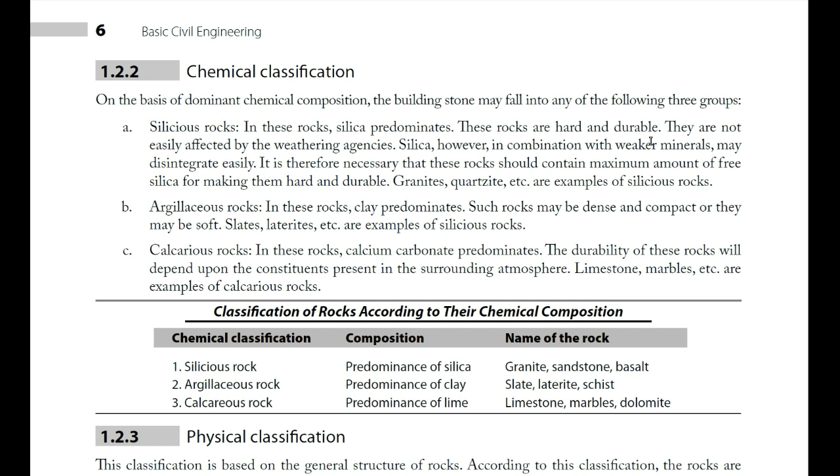Physical classification. This classification is based on the general structure of rocks. According to this classification, rocks are divided into three types.

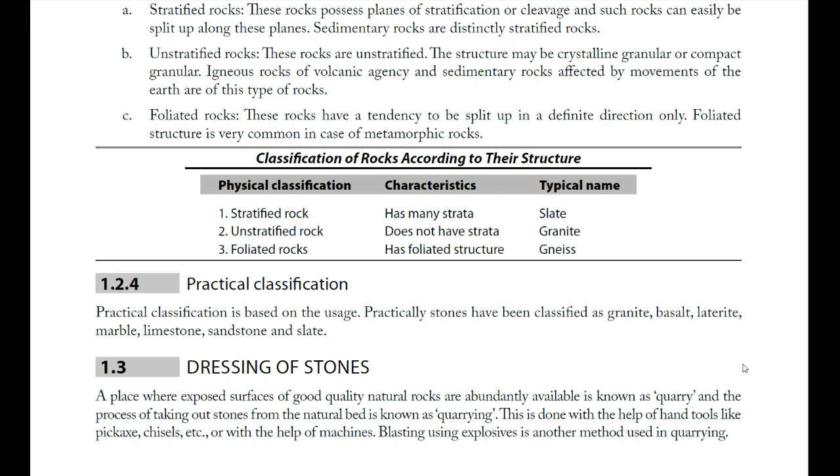Dressing of stones. A place where exposed surfaces of good quality natural rocks are abundantly available is known as a quarry, and the process of taking out stones from the natural bed is known as quarrying.

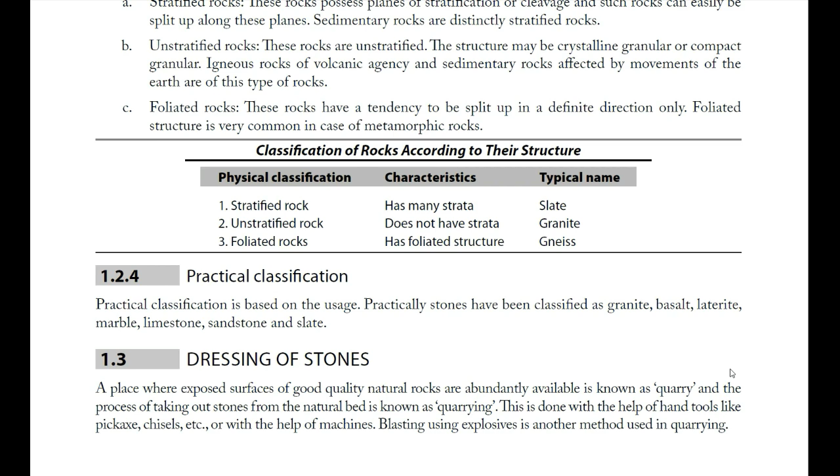Blasting using explosives is another method used in quarrying. The stones after being quarried are to be cut into suitable sizes and with suitable surface. This process is known as the dressing of stones and is carried out for the following purpose.

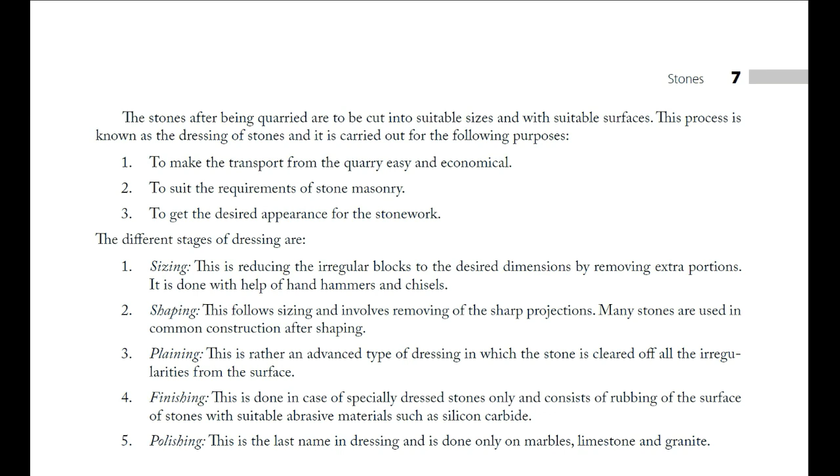There are 5 stages of dressing. Sizing: this is reducing the irregular blocks to the desired dimensions by removing extra portions. It is done with help of hand hammers and chisels.

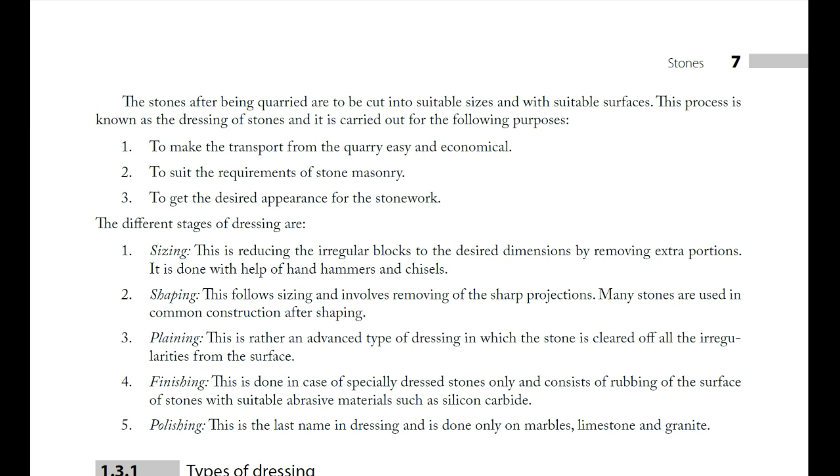Plaining: this is rather an advanced type of dressing in which the stone is cleared of all the irregularities from the surface. Fourth one is finishing. This is done in case of specially dressed stone only and consists of rubbing of the surface of stones with suitable abrasive materials such as silicon carbide. Fifth one is polishing. This is the last stage in dressing and is done only on marbles, limestone and granite.

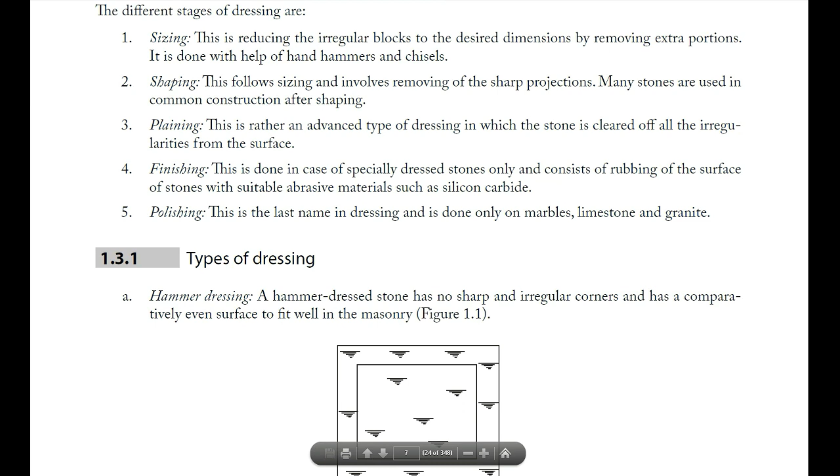Types of dressing. Okay, first one is hammer dressing. A hammer dressed stone has no sharp and irregular corners and has a comparatively even surface to fit well in the masonry.

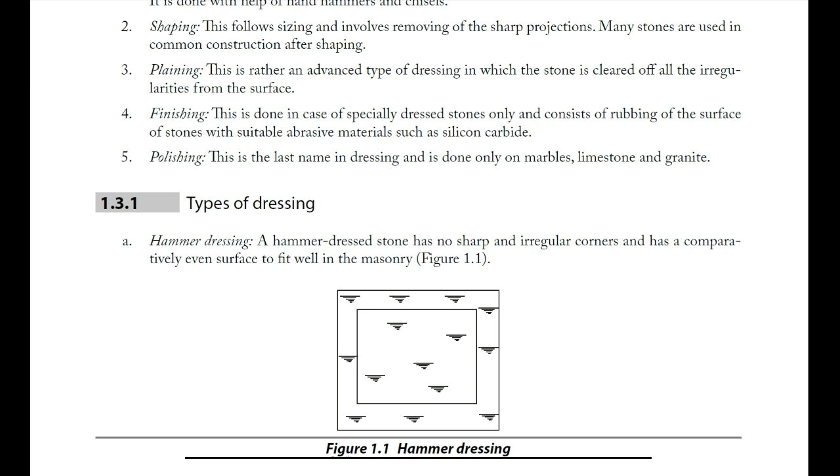Chisel drafting. In this method, drafts or grooves are made with help of chisels at all the 4 edges and any excessive stone from the center is then removed. These stones are especially used in plinths and corners of building.

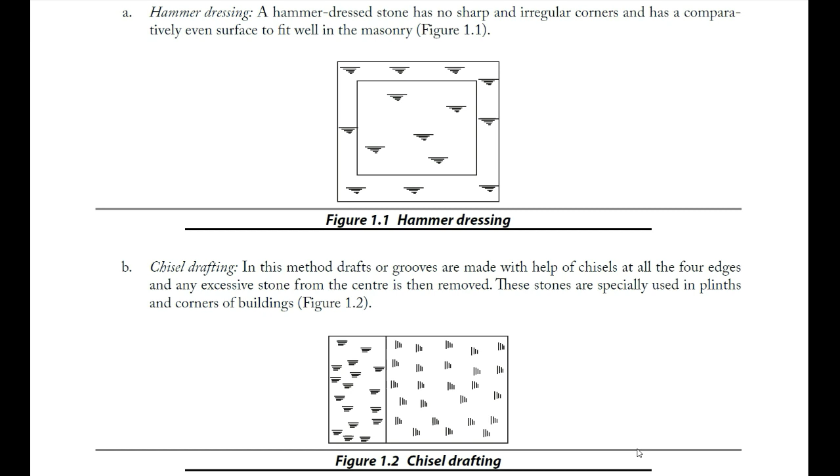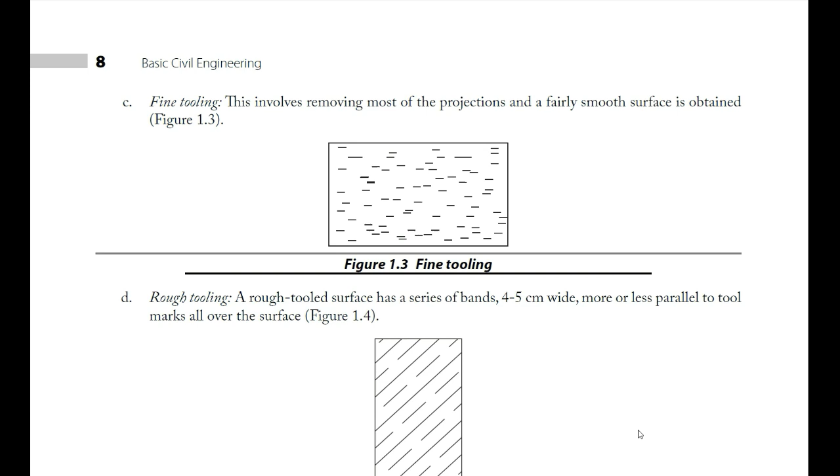Third one is fine tooling. This involves removing most of the projection and a fairly smooth surface is obtained. And fourth one is rough tooling. A rough tooled surface has a series of bands 4 to 5 centimeter wide, more or less parallel to tool marks all over the surface. Okay.

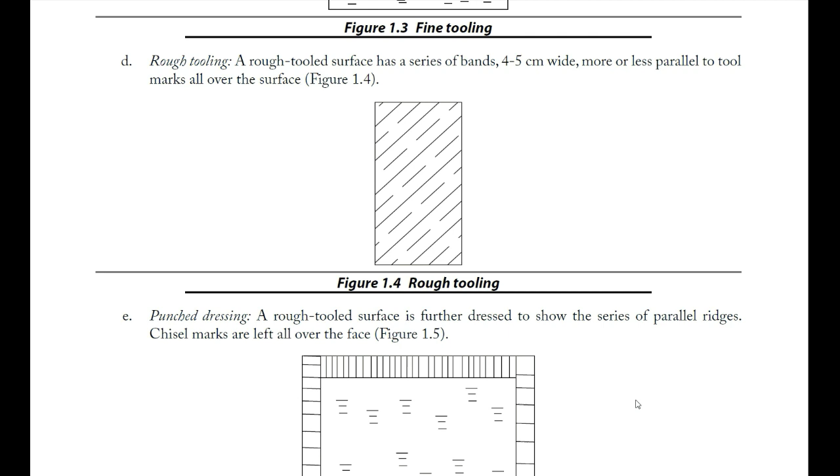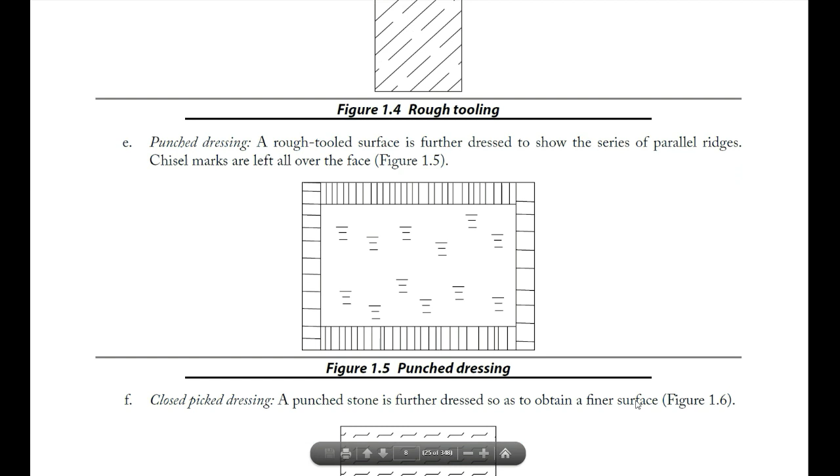Fifth one is punched dressing. A rough tooled surface is further dressed to show the series of parallel ridges. Chisel marks are left all over the face. You can see punched dressing here. Sixth one is close picked dressing. A punched stone is further dressed so as to obtain finer surface.

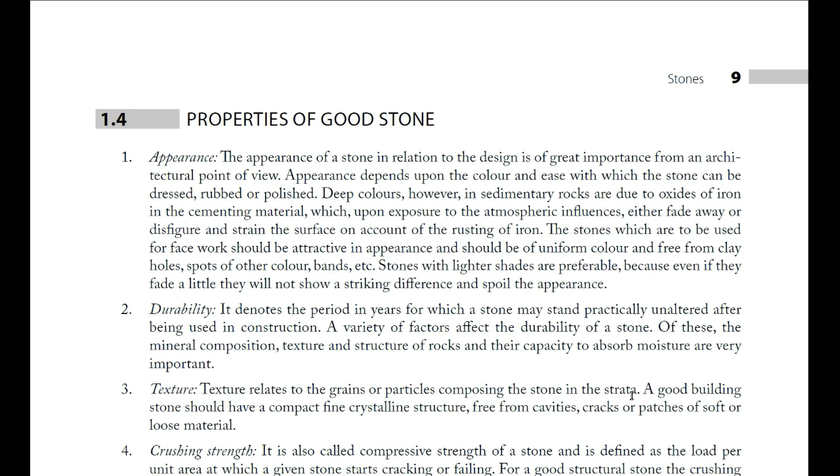A variety of factors affects the durability of stone. Of these, the mineral composition, texture and structure of rocks and their capacity to absorb moisture are very important. Third one is texture.

Texture relates to the grains or particles composing the stone in the strata. A good building stone should have a compact, fine crystalline structure free from cavities, cracks or patches of soft or loose material.

Fourth one is crushing strength. It is also called compressive strength of a stone and is defined as the load per unit area at which a given stone starts cracking or failing. For a good structural stone, the crushing strength should be greater than 100 Newton per mm square.

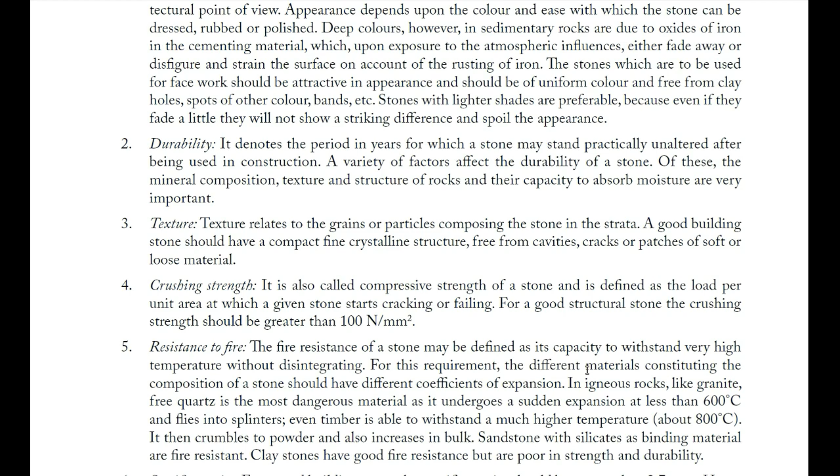Sixth one is specific gravity. For a good building stone, the specific gravity should be greater than 2.7 or so.

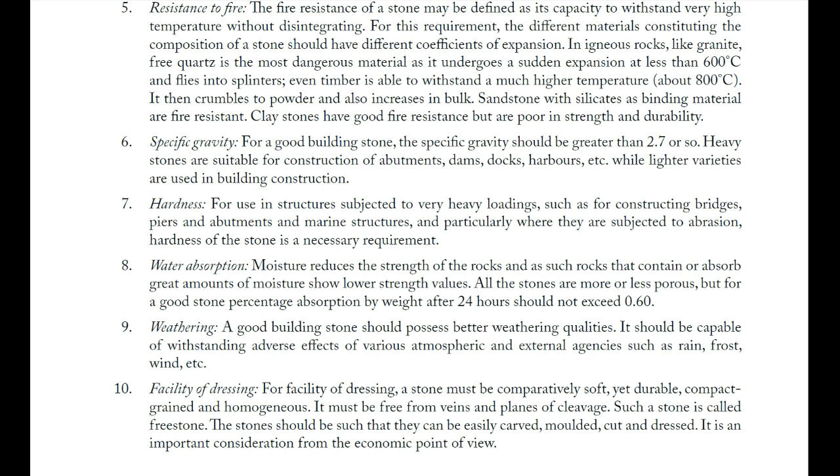And tenth one is facility of dressing. For facility of dressing, a stone must be comparatively soft, yet durable, compact grained and homogeneous. It must be free from veins and planes of cleavage. Such a stone is called freestone. The stones should be such that they can be easily carved, molded, cut and dressed. It is an important consideration from the economic point of view.

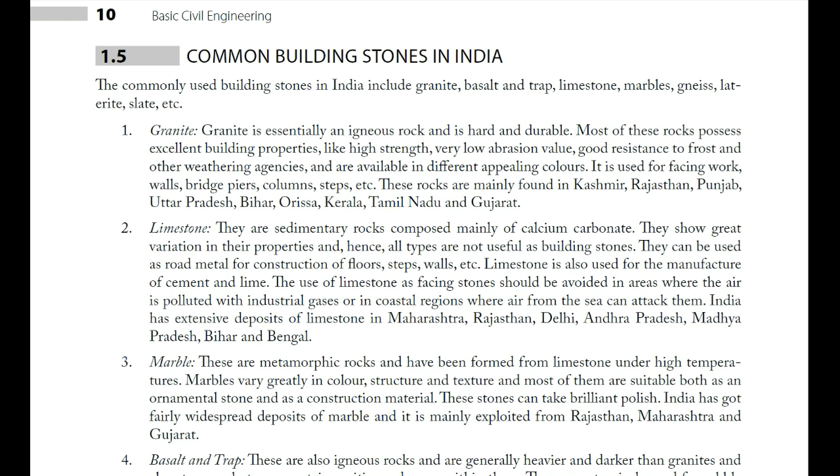Basalt and trap. These are also igneous rocks and are generally heavier and darker than granites and also stronger, but may contain cavities and pores within them. They are extensively used for rubble masonry, foundation work, and road construction. They are mainly found in Maharashtra, Bihar, Bengal and Madhya Pradesh.

Sandstone. These are sedimentary rocks and consist mainly of quartz. Sandstones occur in many colors. The most suitable and durable type is that which is light colored, having silica cement and a homogeneous compact texture. It can be used for steps, facing work, flooring, columns, etc. India has immense reserves of really good quality sandstone in Madhya Pradesh, Uttar Pradesh, Odisha and Bihar.

Laterite. It is a sedimentary rock composed mainly of oxides of iron and aluminium. Laterites are of dull red or brown color, and their important property is that they are quite soft and plastic when cut from the natural bed rock but become hard on exposure. It is used for rough stone masonry work and is sometimes used in place of bricks. They are mainly found in Maharashtra, Tamil Nadu, Kerala, Karnataka, and Andhra Pradesh.

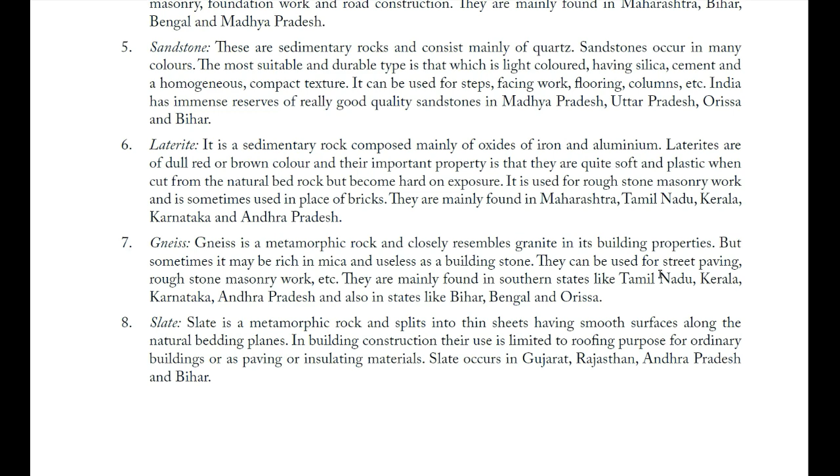Ninth one is Kankar. Kankar is a sedimentary rock and is a form of impure limestone. It is used as road metal, for the manufacture of hydraulic lime, etc. It occurs among the different parts of north and central India.

Muram. Muram is a metamorphic rock. It is a form of decomposed laterite and is deep brown or red in color. It is a soft rock and can be used for fancy paths and garden walls. It occurs mainly in Maharashtra, Tamil Nadu, Odisha, Bihar, and Madhya Pradesh.

Here are some review questions. What are the main uses of stone in building construction? How are rocks classified? Briefly discuss the different classification of rocks. Give short notes on chemical classification of rocks, different stages of dressing of stones, common building stones in India. What are the purposes of dressing of stones? What are the different types of dressing of stones? Briefly discuss the properties of good stone.